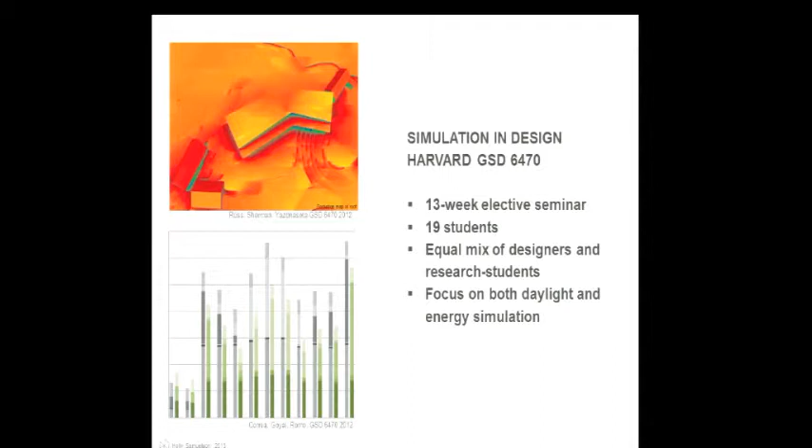More on that later. So I'm teaching a class that's an elective for 19 graduate students. Half of them are research-based and half are Masters of Architecture design-based students. In my semester, they are learning concepts of daylight and energy simulation and using them both in design.

This is a 13-week elective seminar, focused on both daylight and energy simulation.

In the first half of the semester, they're learning daylight simulation, primarily through three assignments. From the lessons learned from the research of Christoph Reinhart and Diego Ibarra, they've found that one of the best ways to teach students is to let them do it first, figure out what they did wrong, and then have them do it again.

So what we did first was give students a space in our school and have them do a daylight simulation of it. They were all working on the same space. Then they got their assignments back and realized no one got the same answer, and figured out what was wrong. Some of the major points were - I purposely picked a space with this giant overhang, so they were forgetting to model the context around the building. They learned to model the adjacent room with glass, the surrounding ground planes, et cetera.

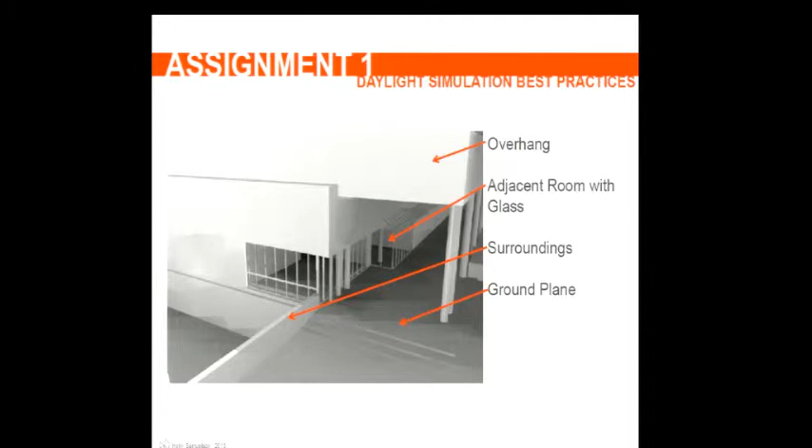So they did this project twice, and then they jumped right into the design project I'm about to talk about. This was a two-week assignment, assignment 3 of 7 in the semester. They had two weeks to work on it, working in groups of two or three.

The idea was to look at our cafe on site and define the daylight shortcomings. Our restaurant here is called Chauhaus, a nod to the Bauhaus and Walter Gropius. They had to set their own design goals, then design an intervention for our cafe. It could be either a low cost option that the school might actually build and install, or it could be no holds barred, a major renovation. They were given a Rhino model of the space to start.

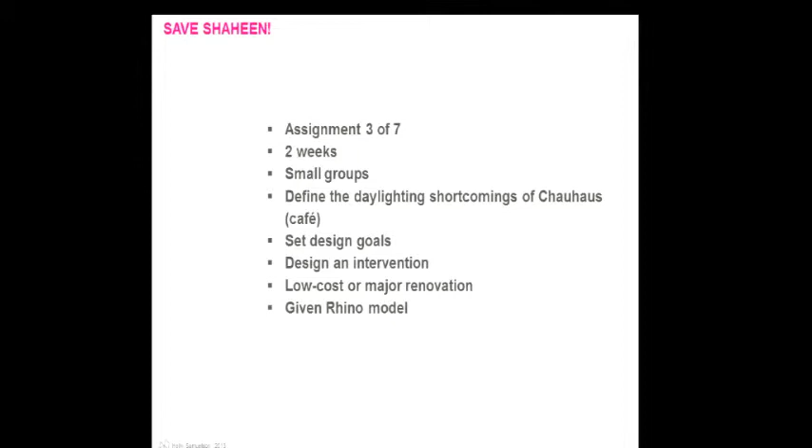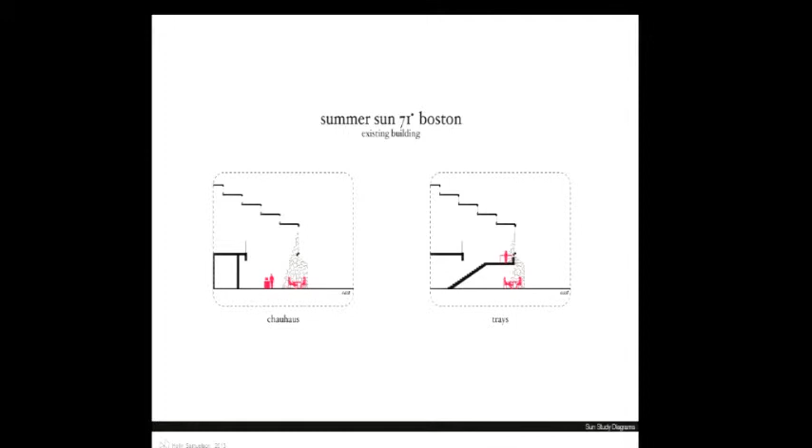I'd like to talk about a couple of the student groups. For student project 1, I picked an example of each approach - this was a major renovation approach. What they did is look at a section through our cafeteria and examine how much sun penetration there is.

And then what they ended up deciding to do was to add on an extra floor as an overhang. They started from an idea of, hey, an overhang here would be nice, then realized the school would never really add on just this little sticky overhang. But what we also have is a major shortage of space, so what they ended up doing was adding more space for studio desks.

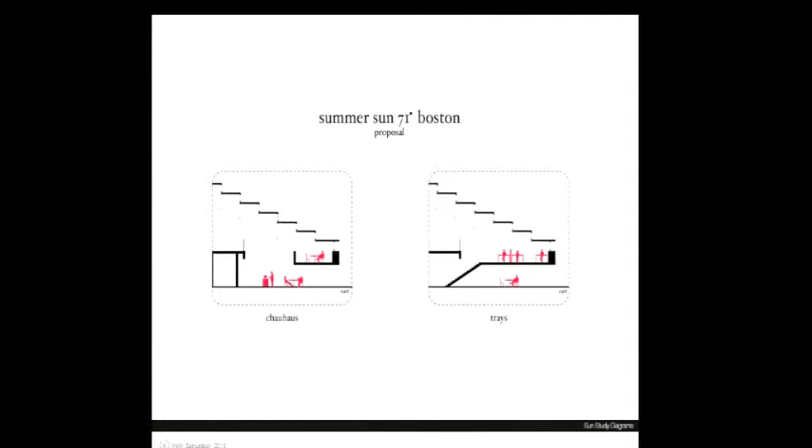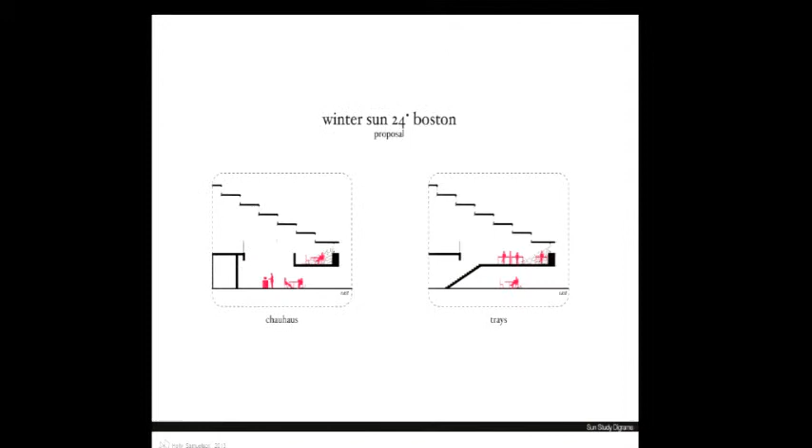It might sound counterintuitive that on the east side this overhang would really help, but I'll get to more on that later. So here you can see the winter sun - this is the before, and this is the after, where they've added the extra studio space.

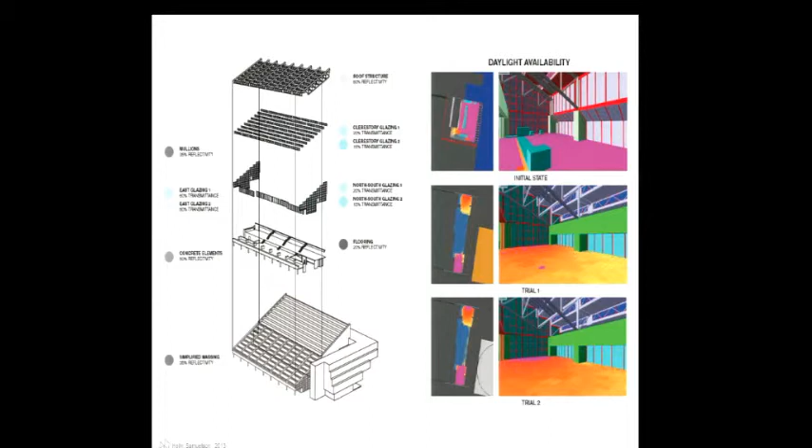And here's where they ran some of the simulations. So some of their assumptions, and you can see the initial state in terms of daylight availability - it's pretty much all pink, and then afterwards, they've definitely improved it.

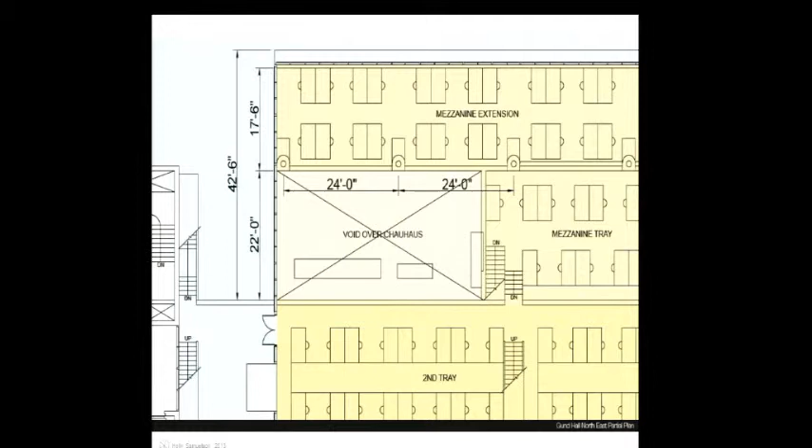And then here's a section, so you can see here's the cafeteria space. Basically our school has a series of stepped balconies, and that's where all the student studio space is. So they basically added an extra level of balcony at the end - here's the double height cafeteria space, and here's their mezzanine extension.

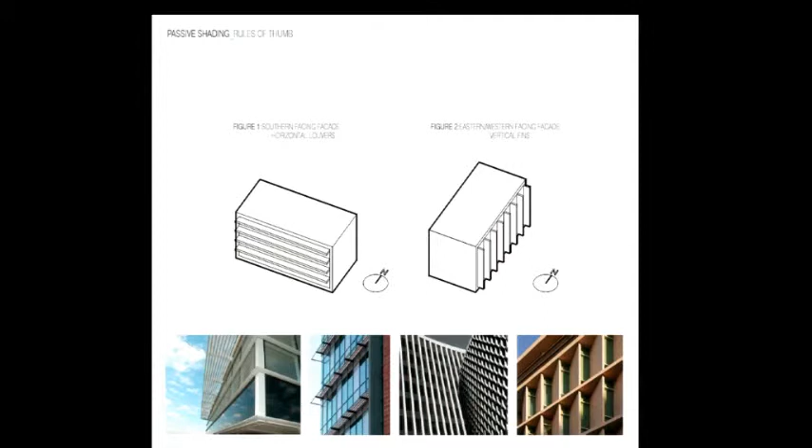Student group 2 took the opposite approach and said, let's design something that could actually be built in this space and that we might get funding for. So what they were looking at is, we have the traditional rule of thumb most people are taught - on the south you should have horizontal louvers, on the east and west you should have vertical - and how does that really work? So that's where they started from.

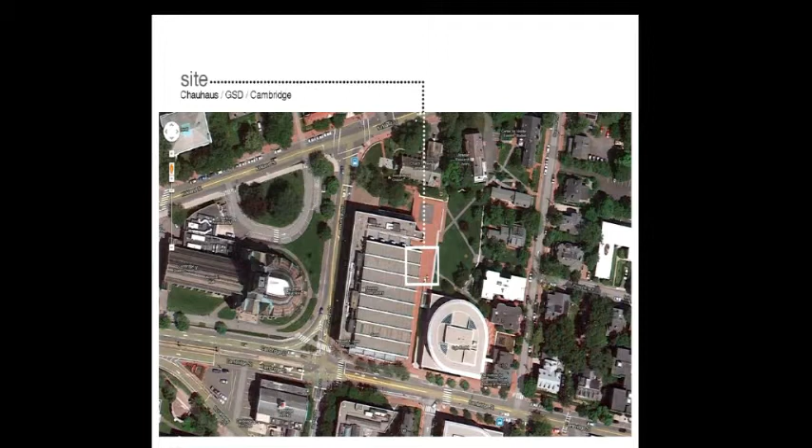But I should mention, here's the site. So here's the northeast corner where the cafeteria is, and we do have a lot of context around here. So here's a shading map.

And what this group actually figured out too, which was pretty ingenious, was that we have this extra wing - there's kind of like a mini courtyard in here, and there's glass right here. So they figured out that the glare problem is not just coming from the south or the east, but it's coming from the north - it's being reflected off of this portion of the building. So they figured out that was something they needed to address as well.

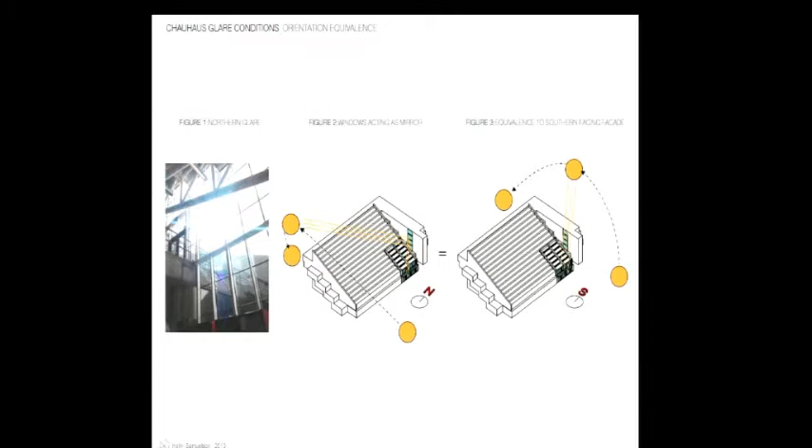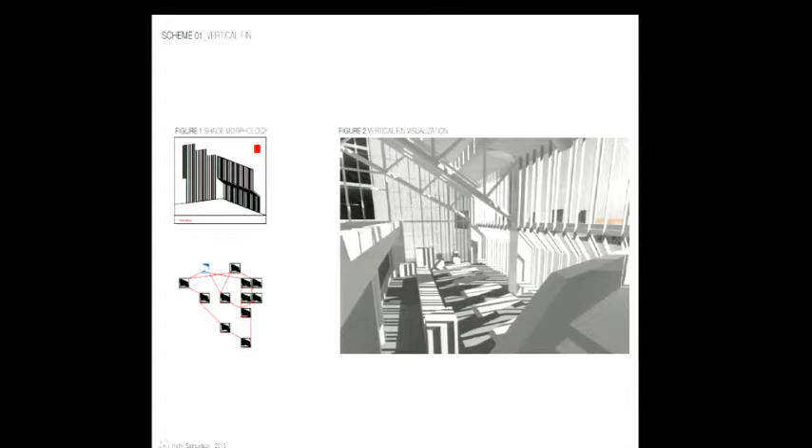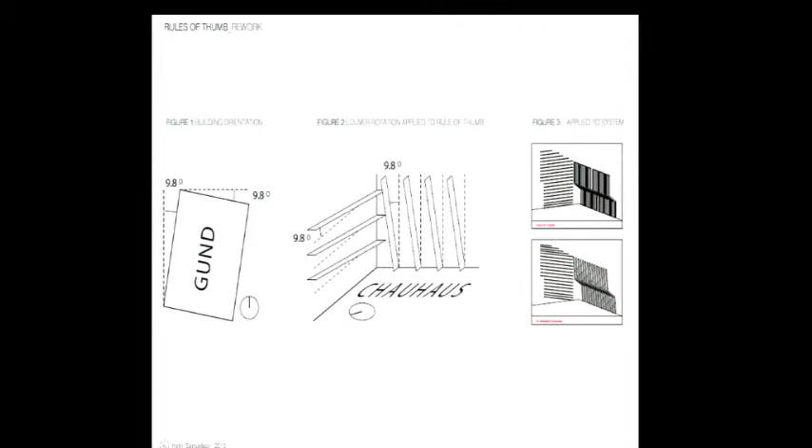They also did the horizontal, and then a combination of horizontal and vertical. And then they decided to get a little creative with the design, and I think this was just design inspiration more than anything. They decided that, okay, we're working with this 9.8 degree tilt - what if we tilt the grid 9.8 degrees? I think it was just some means of inspiration.

And so here they have this warped diagrid. And then they figured out that they still, running the numbers each time - this is kind of their matrix of their design approach, I'm not showing you the whole iterative process - but they kind of figured out that they're still getting too much light.

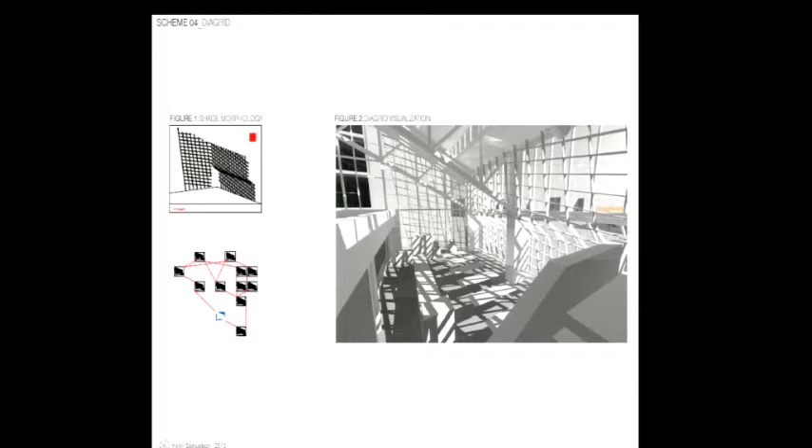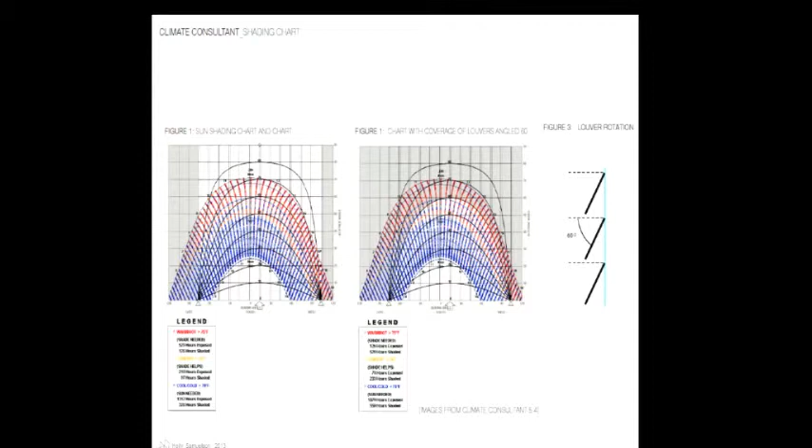This still isn't working, so they went to Climate Consultant - I don't know if you've ever used this, but it's pretty convenient. You can check out different angles of overhang, so that's what they're doing here. And they figured, okay, we really would get some benefit from angling our fins. So that's what they ended up doing.

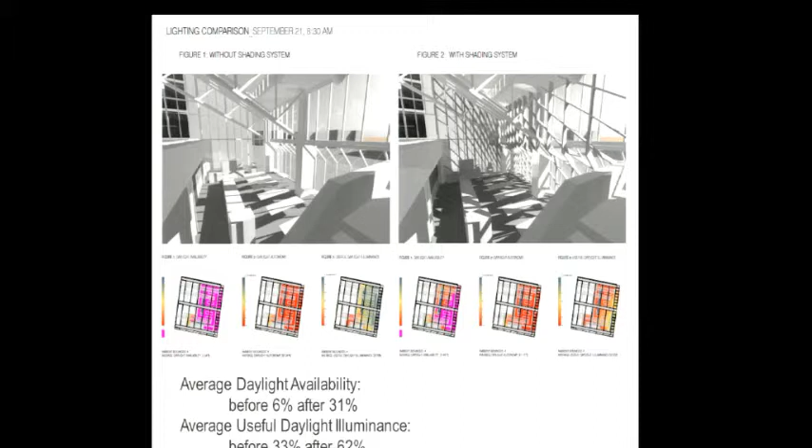They ended up with this warped angle diagrid. It's still a bit of a problem, but for a 2-week evaluation they were able to improve the metrics. Here you can see that was their final design - the average daylight availability was before 6%, after 31%. The useful daylight illuminance improved from 33% to 62%. And here's what it looked like.

Now, one could argue that it might have been better to put this on the outside of the glass, but the thinking was that this is a historic structure.

We didn't really think that Harvard University would approve of doing anything to the outside, and if we were going to build this in our wood shop in the basement at a low cost, having something that didn't need to be weather resistant would be the best approach. So that's why it's going on the inside of the glass.

As it turned out, these were all seniors - well, master's students - but they were all in their ultimate year. So we never did end up building it because they got too busy with thesis, but maybe someday we'll try to apply it.

So the students had a lot of fun with this. Here was one poster, Saving Private Shaheen. There were about 7 different student groups, and the one thing that shocked me and made me very happy is that all 7 approaches were completely different.

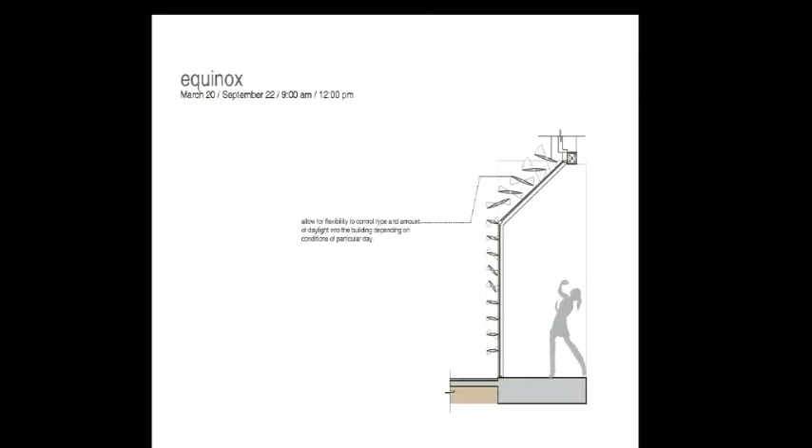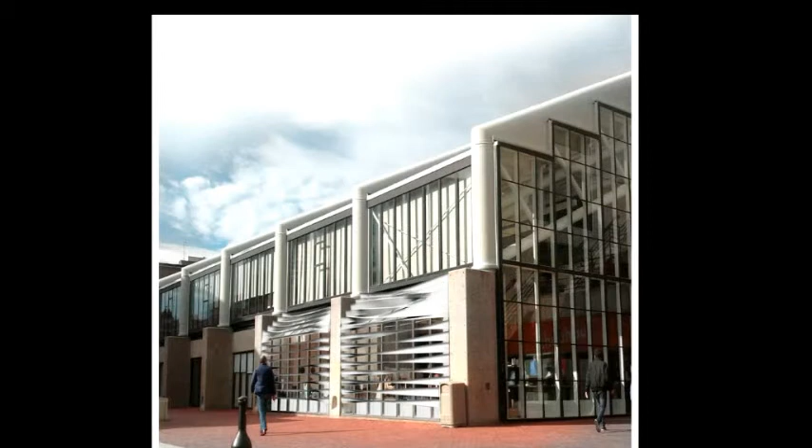Here's one where they had these twisting louvers. So you can see here the no-louver approach, and then with their louvers, they were meant to be operable.

Someone got the great idea - they also did another project, but then at the end they said, hey, what if we just put a tree up here? And it was kind of tongue-in-cheek that this tree probably outperformed all of them.

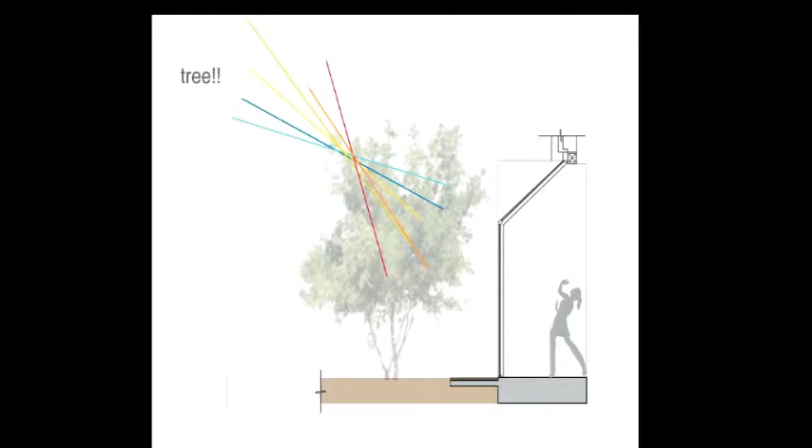Someone else had kind of an opening garage door, scissored louver effect, and they got pretty into trying to use some of the dynamic tools and model at different times of different seasons to figure out what degree of openness we would have.

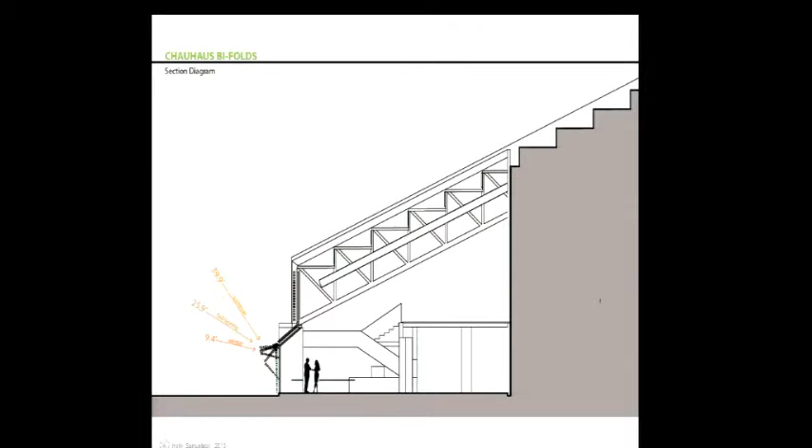Another group, without knowing about Shaderade, kind of developed their own Shaderade-like tool, which was really exciting. And then their design implementation was the cloud. They figured out exactly where the cloud would need to be more dense and less dense, but it was kind of lacking in its design realism a little bit.

So the title on this one is, Did We Save Shaheen? That was just the title - I thought it was funny. I wasn't actually trying to save Shaheen, to be perfectly honest.

But I had this idea that I really liked with student projects - we have this digital bulletin board in the cafeteria, which always has the same thing on it for like 6 months. So I said, hey, what if we made posters of each of the student projects and just put them rotating on a slideshow in the bulletin board?

So we did that, and then the next thing you know, Building Services rearranged Chauhaus. So I don't know that we had anything to do with that - it might have been a coincidence. But the interesting thing was they took the cashiers.

So part of the problem is that other people, they can choose where they want to sit. It's pretty crowded, so they only have some extent of choice. But the poor cashiers are just stuck here, and they just fry all morning long.

So one thing that the management did was, without consulting us, they moved the cashiers from here over to this end of the cafeteria, which if you look at the simulation results, you realize it's only marginally better.

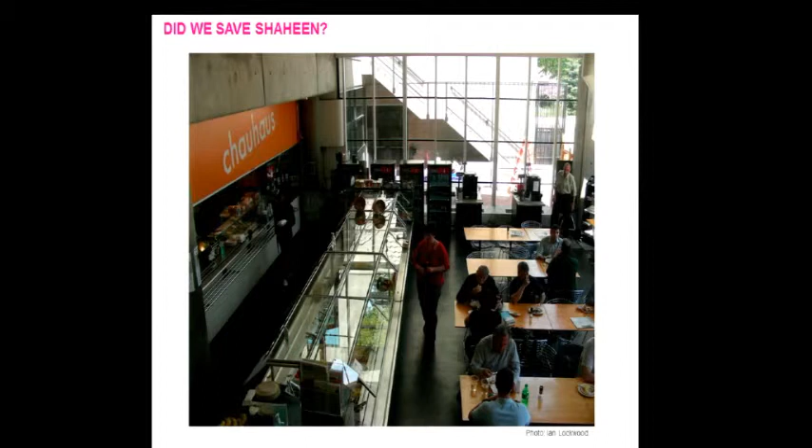It's not really the best approach, but they're trying to solve apparently two problems. One was the daylighting problem, and the other was apparently there's a decent amount of food that goes missing from the cafeteria. So they thought that if they let the cashiers keep an eye on the whole cafeteria and stood between the food and the exit, that they would stop that problem.

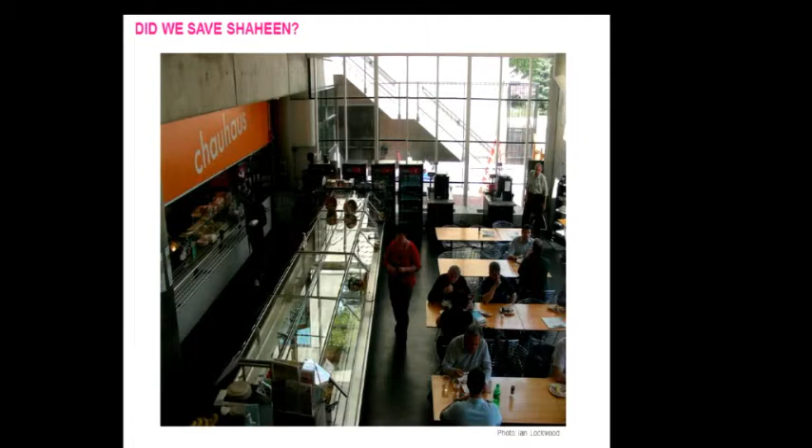So we'll see how that works out. So we moved from there to there. Okay, so that was - I'm going to keep going, I have one more project to show. Thanks, that was project number 3.

And then here I'll talk about project number 7, which was their final project. So they learned some thermal simulation using Design Builder Energy Plus. And then in the end, they had to design a camp for 4-H students on Long Island. So here's the site.

I thought that this is a real project - it's a nonprofit client of one of my colleagues, and they're trying to, as you can see, it's near the shore. The interesting thing I thought about this project was all of the views are to the north. The client is interested in having an educational building and interested in some degree of net zero, although I'm not sure exactly what he wants there. But I thought that was an interesting project.

So I'm just seeing how I'm doing on time.

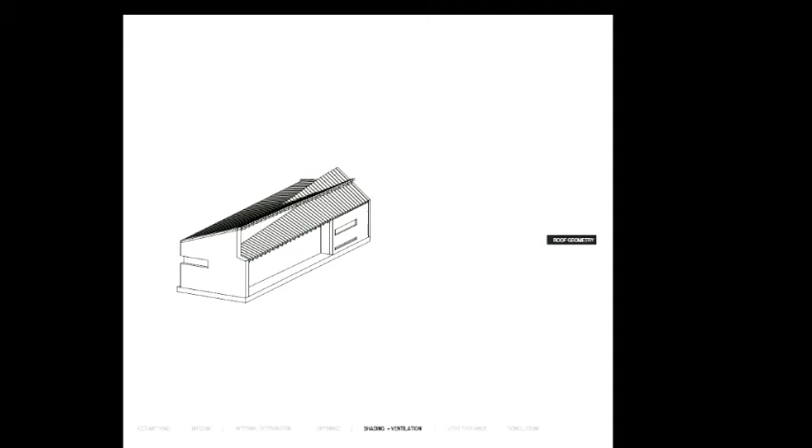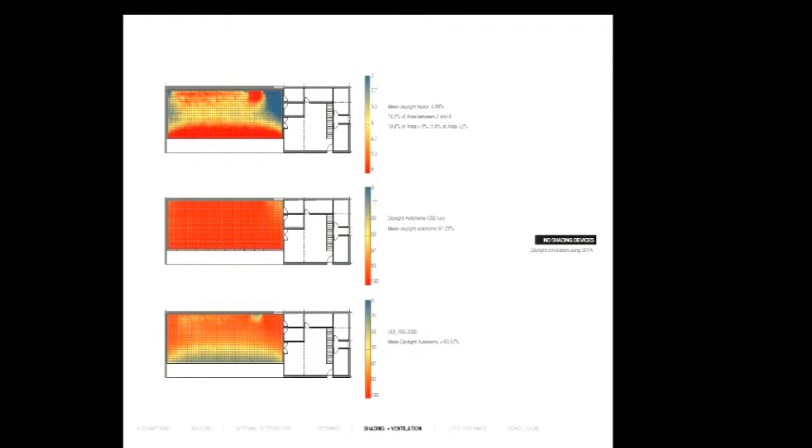So here they were basically looking at their different roof geometries, pretty straightforward, using the simulation to help design the clerestory, looking at no shading devices. The interesting thing was that I think this is actually upside down, and this is to the south.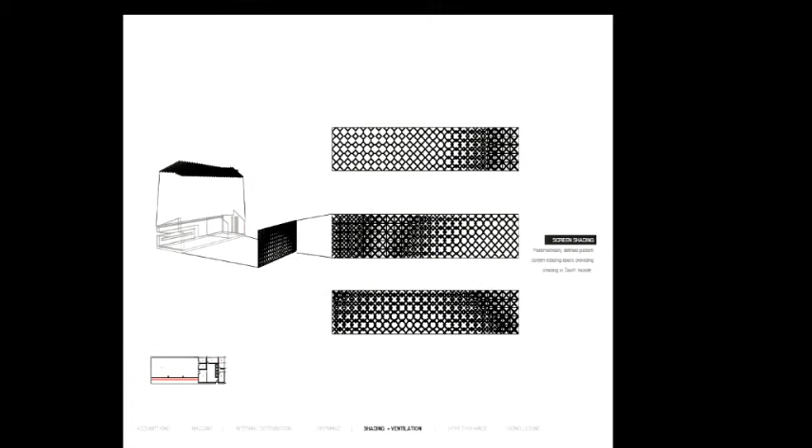So looking at a movable wall, here's a screen shading device. Here's another student group, so they were using the radiation map to try to size their solar hot water heating.

I should mention that I shot myself in the foot a little bit with this project because I kept adding different layers to it. At first I got very excited - okay, here's this net zero energy project, that sounds great. This camp - how much more fun can you get than a camp for kids? Everyone loves camp.

But then I realized that it's an assembly space, so it's a dining hall/cafeteria. It has a commercial kitchen. It's mainly occupied in the summer. And I tried to get the students to be very rigorous about the internal loads, really looking at commercial kitchens and assembly spaces and how many loads would be in there.

I realized that even though we're in New York, I suddenly created a really cooling-dominated building. So it became very much about natural ventilation, and I'm not sure I had time to really cover that as fully as I would have wanted to with these tools in this semester. That's something I'm going to do differently next time.

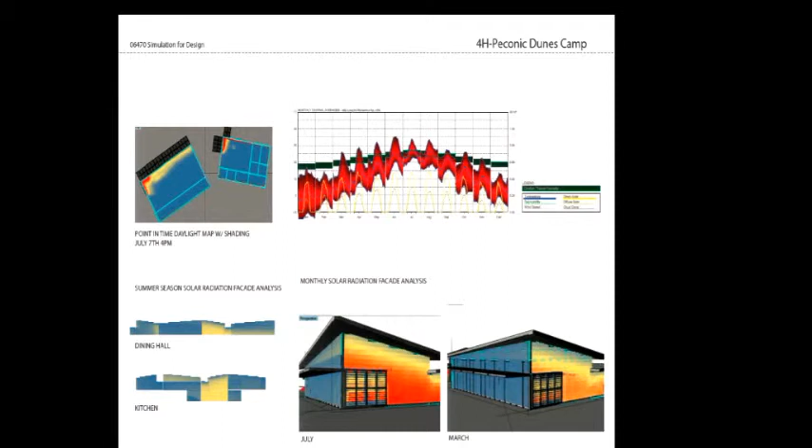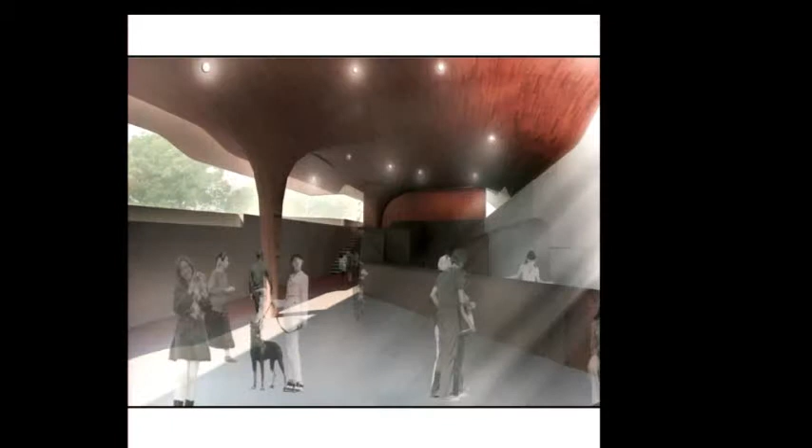They had one occupiable area above, and then the tubes were bringing some amount of light to the area below. There was the assembly space for the students to gather and eat, and then below was cooking and an apartment, etc.

So one of the projects we did was each student group ended up with a different climate, and they were in a head-to-head competition between two groups. They had to design the best performing building they possibly could, energy-wise, and then the worst possible building they possibly could.

And they had rules so they had to fall within the constraints. Then the delta between the two - whatever the energy difference was between your best performing building and your worst performing building - you were trying to make that as big as you possibly could. The team with the higher delta would be the winners.

I actually found that when you're not relying on rules of thumb anymore, and when you're trying to break the system, you really have to think about it. Okay, well, within reason - what if I made the ceiling heights 10 meters high or something like that? Maybe I should make it all glass and face all my glass in one direction or another.

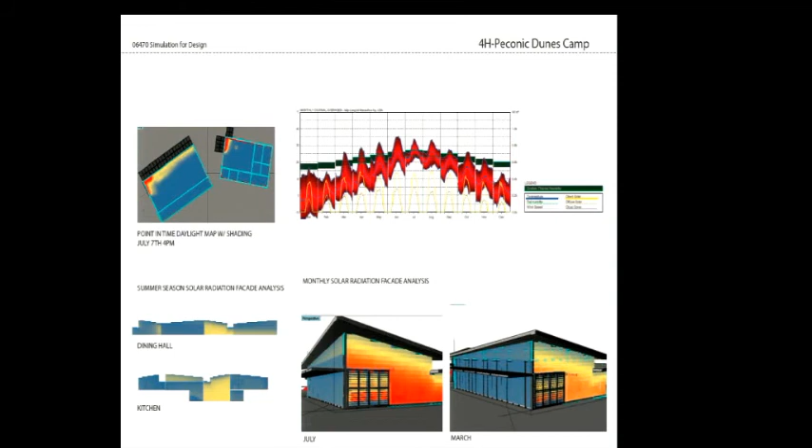The daylighting project was an existing shading retrofit, and then this camp project is actually a new building - the client had already decided they're tearing down their old dining hall, so this is a brand new building and the students could come up with their own design for it. So they designed a full building in the class, and it was a pretty simple program, to be honest.

Two things: one thing that made me very happy - there's a culture in my school where some designers worried that sustainable considerations lead to cookie cutter design, that if we think about energy and daylighting we'll all end up with long boxes with south-facing light shelves. I was very happy that in the first project they were all wildly different - I didn't even think there could be seven such wildly different approaches. Then in the second project they all came closer to the center, mostly long boxes, though here it's angled more for view than thermal reasons.

So it's interesting - I'd like to pick something where I'm hoping the results will end up more varied next year. But do you know that's directly a result of simulation, the shape of the building? It could have been for other reasons, right? Mm-hmm, mm-hmm.